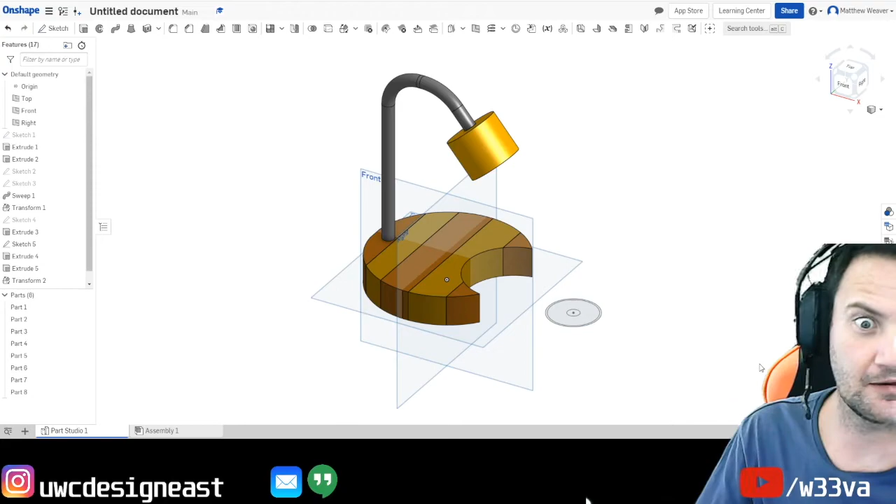Right then, so in today's lesson for Onshape, we are going to draw a lamp. And the lamp, start again. Okay, in today's, start again.

In today's lesson, we are going to draw a lamp using Onshape. The lamp will be made of strips of wood for the base. It will be a bent aluminium tube for the arm, and for the shade we will do a standard cylinder with a hole in it.

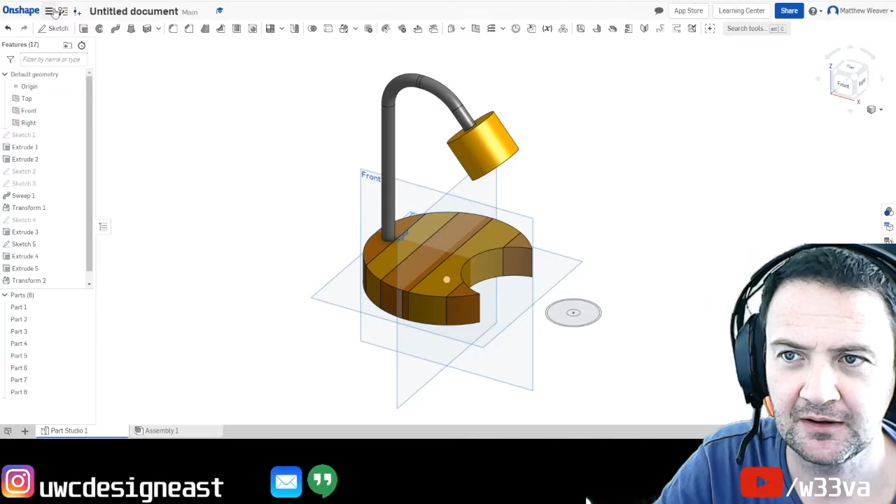We're going to cover the basics really, so nothing too difficult. It should end up looking something like this, but I'll draw it from scratch. Once you've signed up for Onshape using your educational account, and you've used the school's phone number instead of your own to protect your data, you don't need to install it because it's web-based.

What you'll do is you'll end up with something similar to this. It will be a blank page, hopefully, and all you need to do is go to create and document, and then we'll call it something. So let's call it lamp.

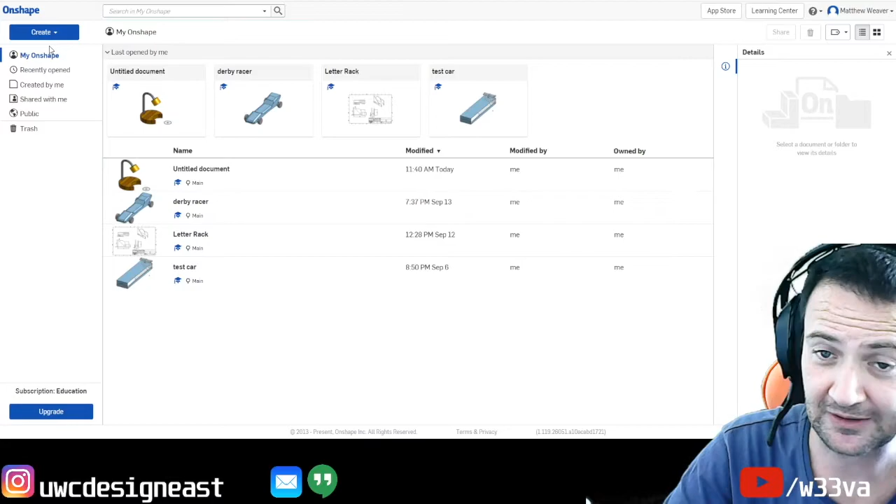Now because we're using the web and not an app that's pre-installed on our computer, things do take a little bit longer than in something like Fusion, because we've got to wait for the network. When you get to your new project, you'll be faced with three planes. That is the top plane, this one here, and that is you looking directly down at it. If I click top on the view cube, that's a 2D representation of that plane. We've also got the front, which is there, and the right as well.

So there's your view cube. To get from back to front, you click the outside. To go to your 3D views, you click the corners. To go directly to it, you click the word itself.

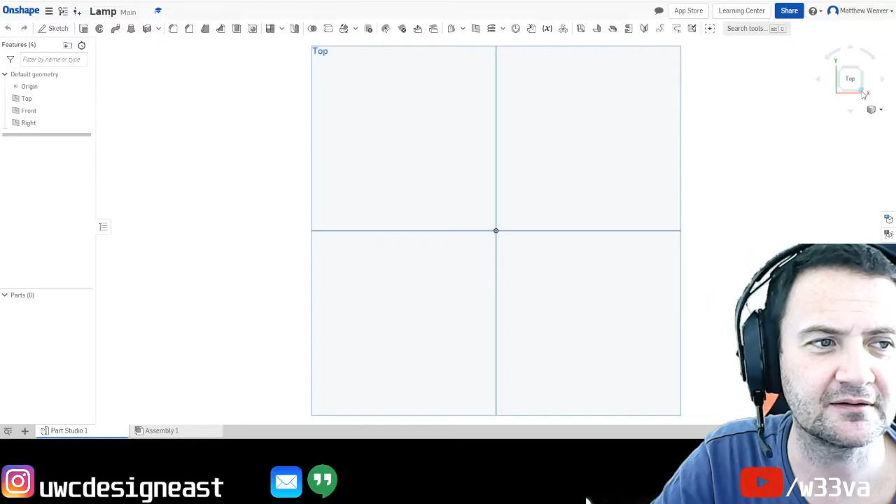The way it works is we draw a sketch, and then we extrude that sketch into a solid, and then we start a new sketch and extrude that sketch, and so on until we've got all the bodies, and then we put them together. It's very simple, and we're going to go nice and gently so we can get started with Onshape, because I know it's quite new for quite a few people.

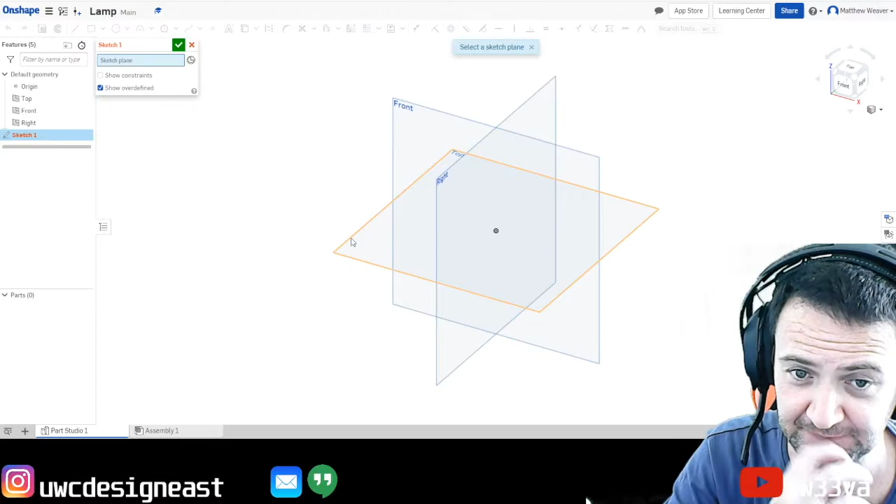First thing we're going to do is click sketch. The sketch plane we're going to draw on for the base is going to be the top, so we're going to look down, draw our shape and extrude it out. And then, apologies, let's cut that. Okay, so the first thing we're going to do,

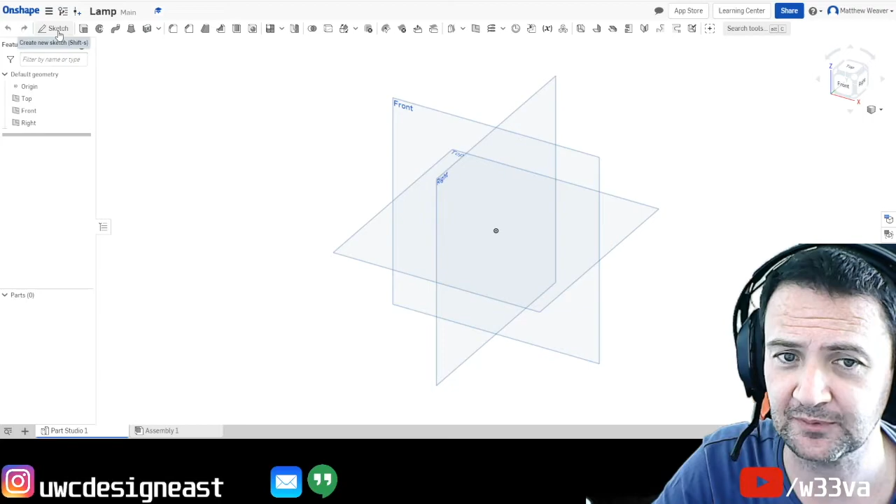the first thing we're going to do is set our work units, because at the moment they're in inches. So we click on the three lines next to Onshape, go to workspace units, and where it says inch, we're going straight into millimeters. When that's done, we go to sketch. In blue it says select the sketch plane, so we select top, and we're going to draw the profile from the top down and extrude that out.

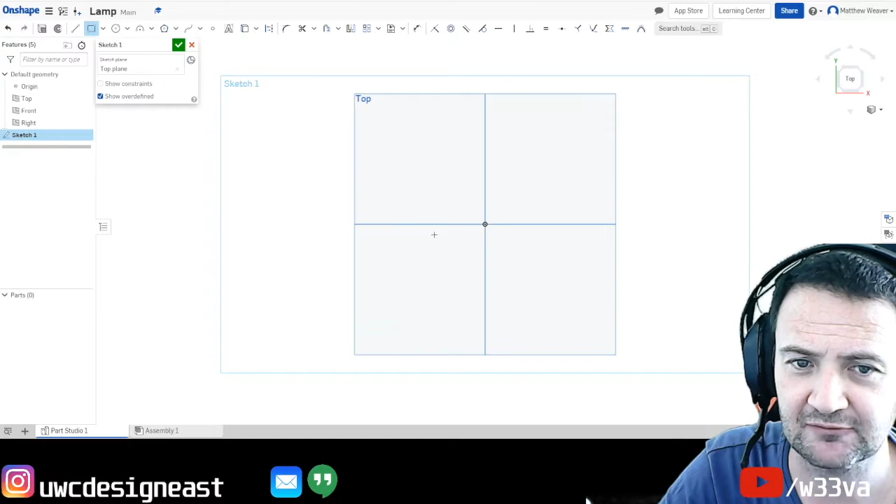Now I'm going to go to the view cube and click top, so I'm looking directly at it. Remember what our construction lines are, that's what we're going to start with. We're going to draw a rectangle that symbolizes the total amount of material you're allowed, or that you have. There's our rectangle, and I'm going to add the dimension, so I can press D, or look across to the right and click that dimension.

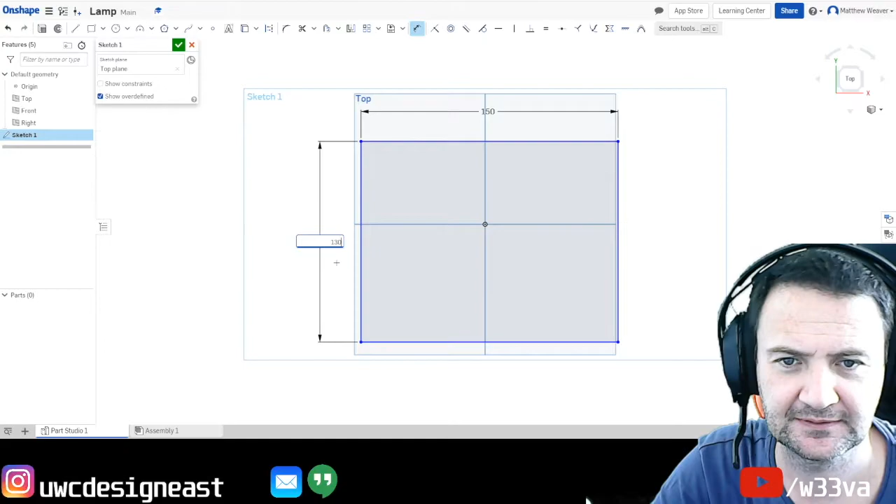I think it was 150, press enter, just wait a little, there you go, and D again, click that, and we'll do 130. Okay, so that's done. Now obviously we're not going to be using all this material, and we're not making a square, so I'm going to turn this into a construction line. There's the button there, Q for construction, or click that, press escape, press the construction line.

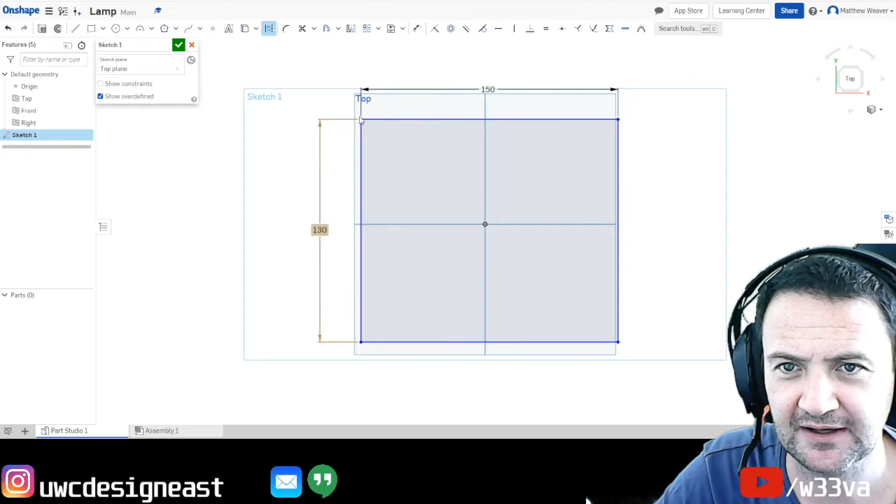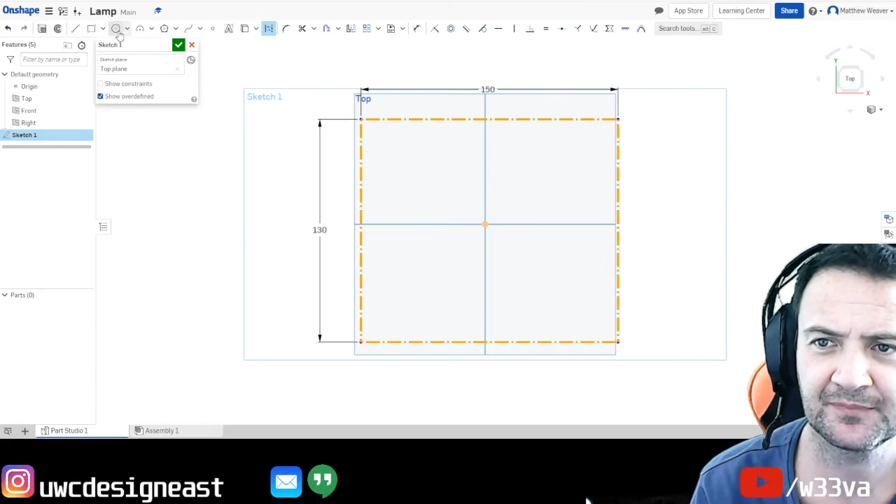Okay, and now we're going to click it. What I did is I selected all the lines and pressed the construction button or the letter Q, and it turns those into construction lines. So now I draw my shape within the construction line box, and my shape that I've been demonstrating quite a lot has been a circle.

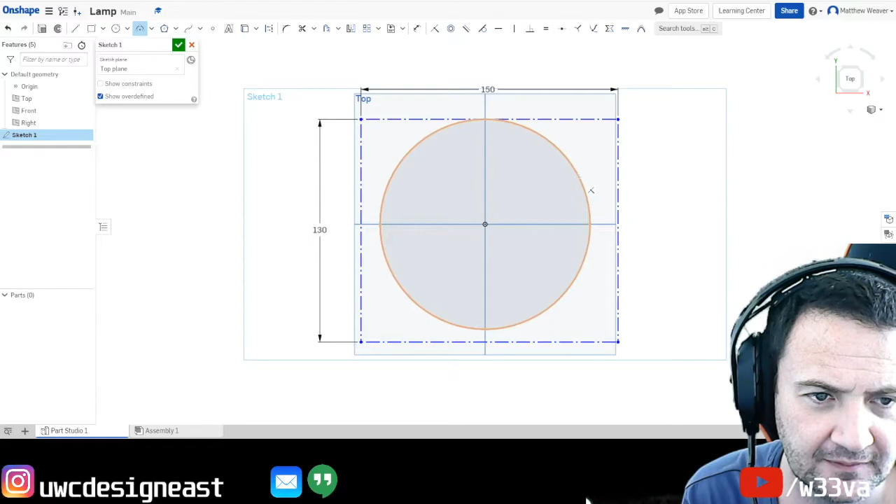Let's not go overlapping. So there's my circle. Now I'm going to unselect, select that, and go back into not a construction line. So there's the circle, and it's had a circle taken out of it. So here we can actually use the arc tool. I'm going to click the arc, click once, click twice, and then just bring that in a bit.

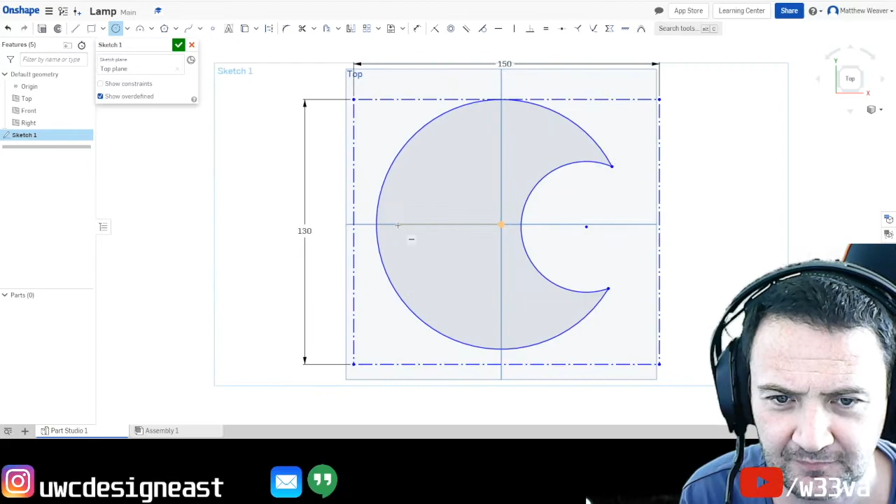Okay. Now the beautiful thing about Onshape as well, instead of like Illustrator and things, is that you can trim. So if we have a look at the trim button, which is the letter M, or the scissors, I can just trim that out. And there's the profile. Now it's pretty much done. All I need to do is make a hole for the pole. So I'm going to click the center point of a circle and just draw that hole there. And I know it's the wrong size, so go to dimension, click the circle, and just type in 10. And that's updated.

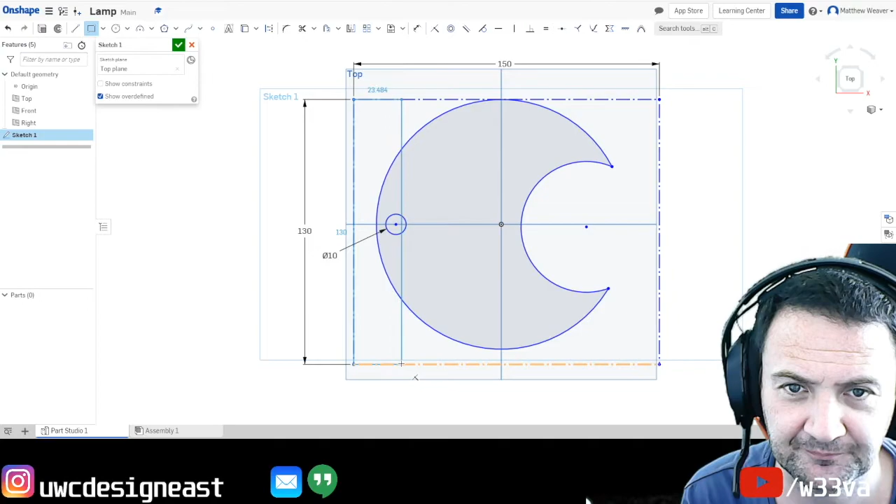Now we're making this out of planks of wood. Okay, so what I'm going to do is I'm going to draw rectangles that represent the planks of wood. These aren't going to be construction, these are going to be real. So it's about 23, and that one, and of course they are random, so you'll have to measure your own planks of wood. And these are the planks of wood, and as you can see, that now looks a bit more accurate. Okay, so it is going to look something like that.

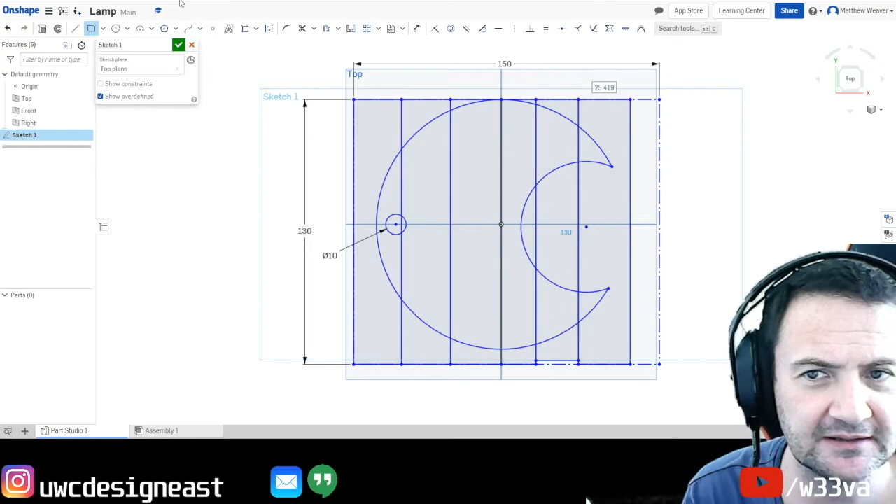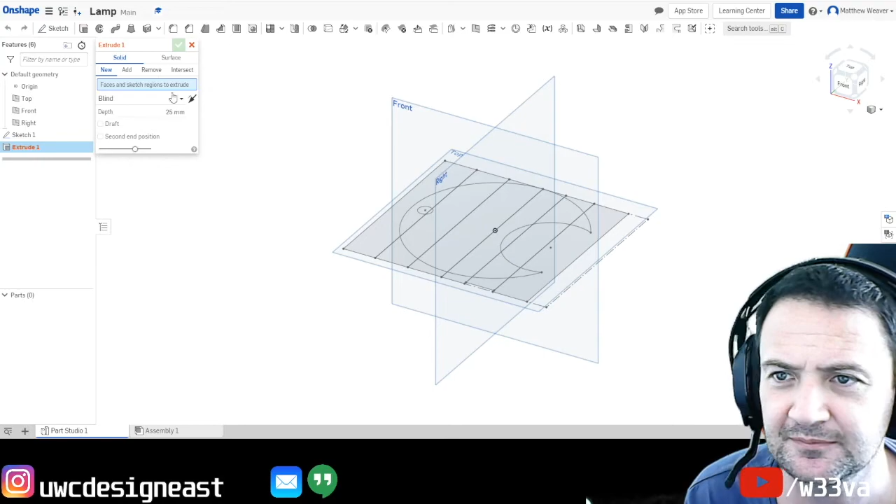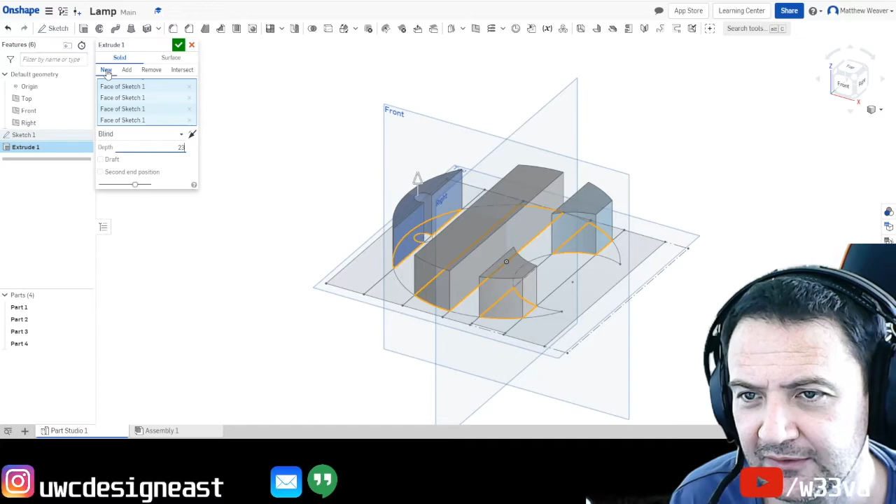Okay, so let's stop that sketch. So press tick when you're happy with the sketch, and then we're going to go to a 3D view. So I'm just going to click one of those corners. Okay, and now what we're going to do is we're going to extrude. So that is Shift E, or the first button next to sketch, and we're going to select the alternates. Okay, so let's zoom in a bit. 1, 2, 3. Okay, we're going to do that, and I think the height is 23 for some people. Of course, you'll need to measure the wood first. And we're creating new solid, so that's okay.

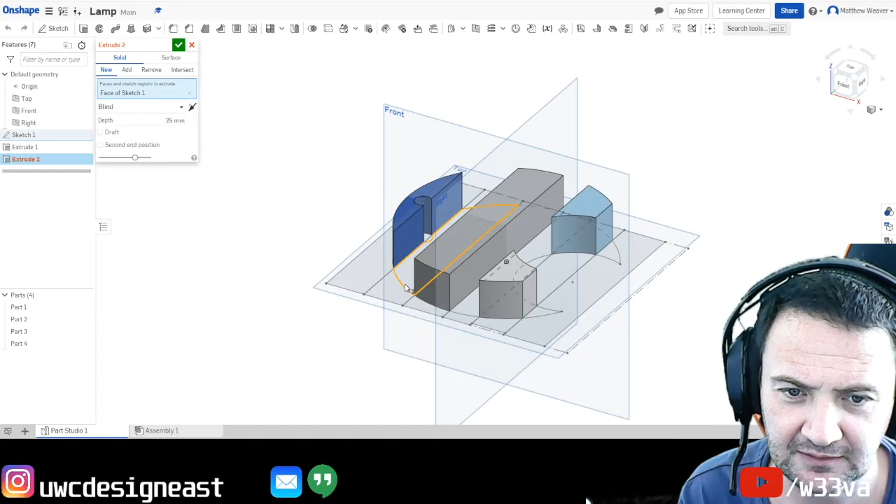All right, now nothing's actually been deleted, it's just disappeared. So if we have a look onto our left hand side, we can see the sketch has got a little eye with the line through. So let's show that sketch again, and this time we're going to do it for the others. So we're now going to click, click, click, and click. Okay, now if they're different sizes, you can put them as different sizes. I'm going to do them as different sizes because I think it looks pretty cool, but you don't need to. So I'll leave them as 25.

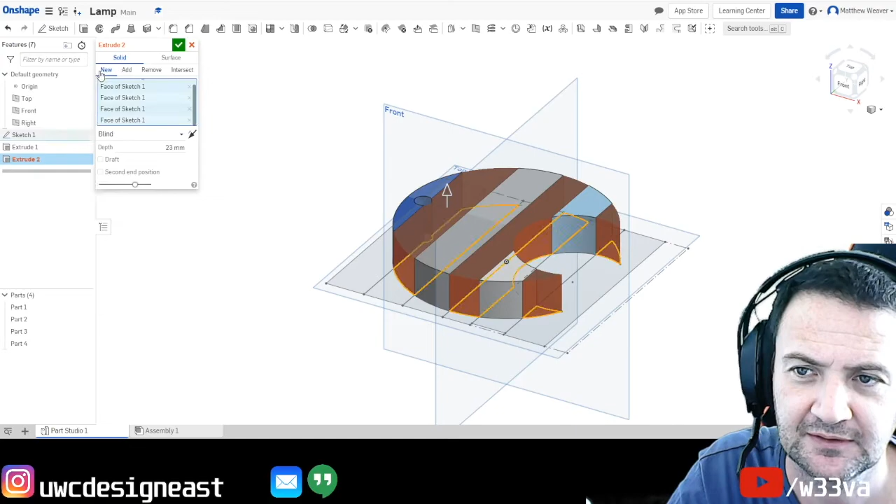If you said you didn't want them to be the same size, what we can do is we can go to 23. Now what you've got to be very, very careful of is, if they're all one size, you might get the add button. Now if you get the add button, that whole piece becomes one piece of wood. So it's got to be new, so that they're all separate, and that means we can assign them a different color. Okay, so let's do 25 and happy with that.

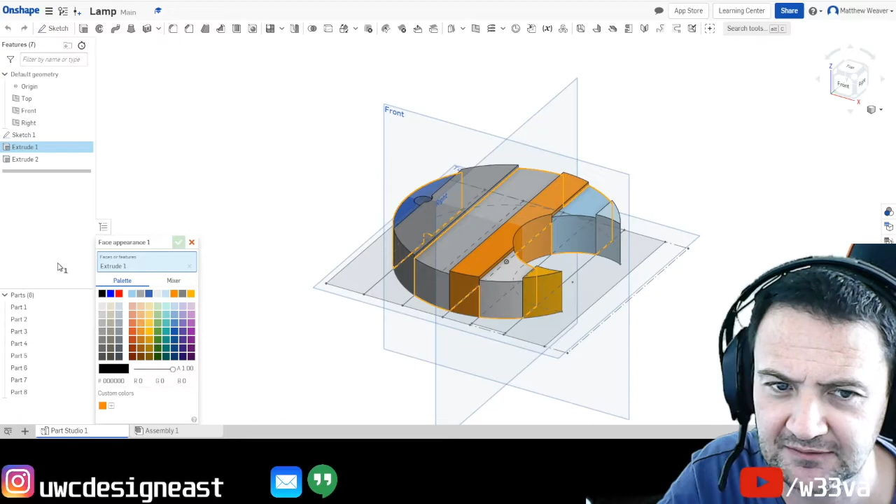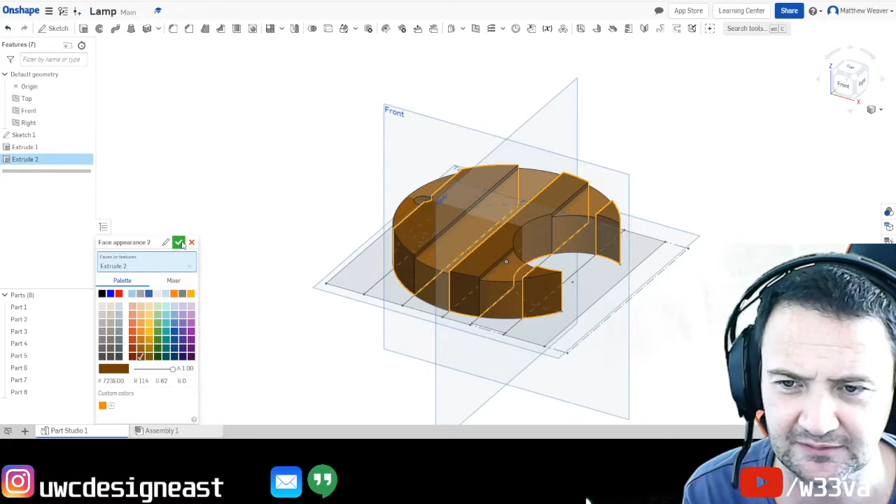Okay, so I've got extrusion 1, the first ones I did, extrusion 2, the second ones I did. Click that, right click, add appearance to the feature, and I'm just going to do that shade of brown. And then extrusion 2, right click, set appearance, and do a different shade of brown. So I've got 2 separate shades of brown. It doesn't look as realistic as Fusion, but it's a lot quicker, and if you're under the age of, I think, 14 or something with Fusion, you're just not allowed to use it anymore. Okay, done. So that's that.

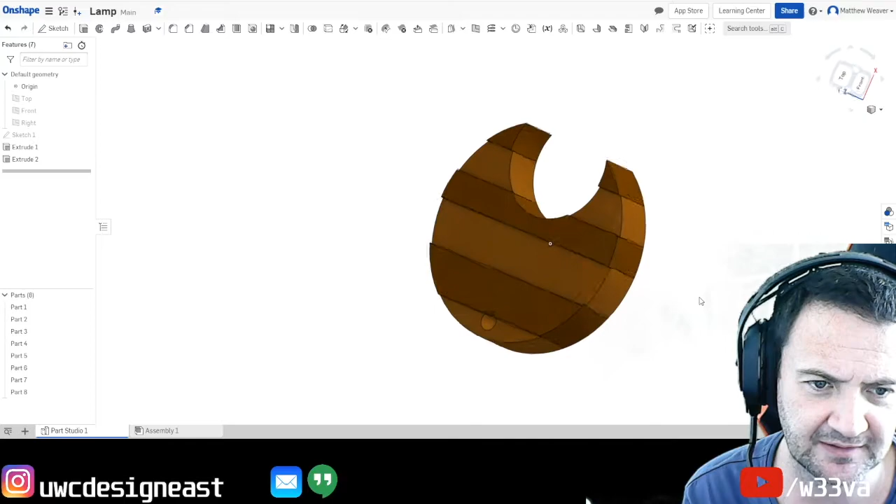It's a little bit confusing. Why don't we hide the sketch so we can't see that? And we can actually also hide some of these planes for the time being. And there we have it. Now you can actually right click and just spin that around. Have a look. There's the hole.

So let's start with the pole. Now the pole's a little bit different to just standard extrusion. What we're going to do with the pole is we're going to do something called a sweep. In order for us to do a sweep, we need to draw a line that would represent the pole itself, and then we have to draw something called a profile, which would represent the material the pole is made from.

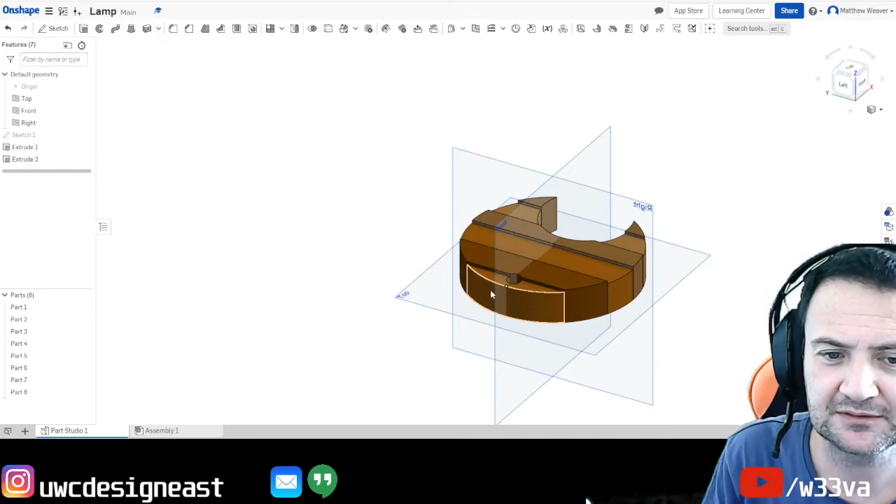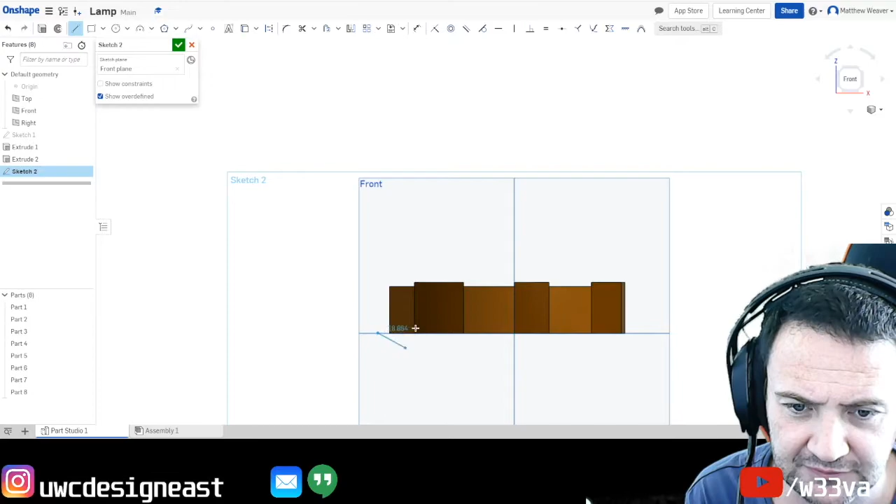So the first thing I'm going to do is I'm going to go to the front plane so we can see the side. I'm going to zoom out a little bit, and I'm going to start a sketch. Okay, now the sketch plane is going to be front, and I'm going to draw what I want the lamp to do. So if I just start on that line somewhere, and I want it to come up, and then I want it to go across, and then I want it to go a bit like that. Okay, and I'm happy with that. Press escape.

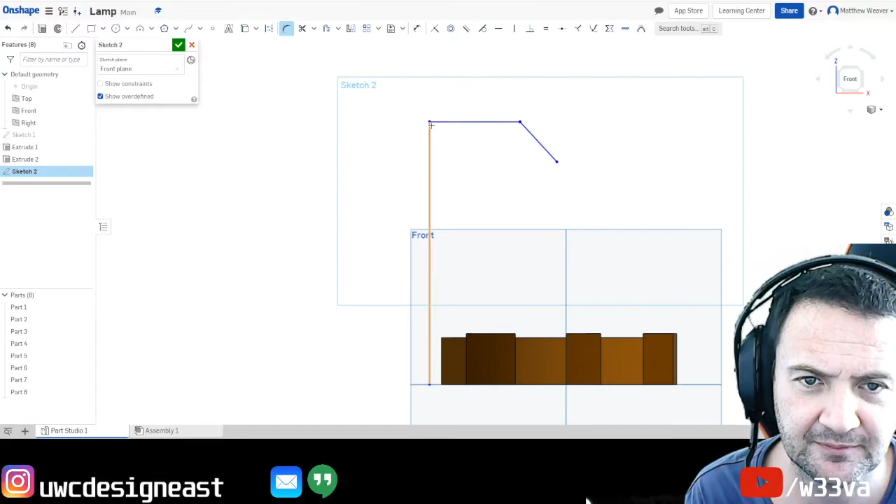I'm not gonna do the dimensions, but you should, because this is planning. The next thing we're gonna do is add the fillet. Now, we can't bend a 90-degree angle with the tube because it will snap in real life. So what we have to do is introduce the bend to it. So select the sketch fillet, the corner, or you can do the 2 lines, and then just move that to what you want. Okay, so that's pretty good and done.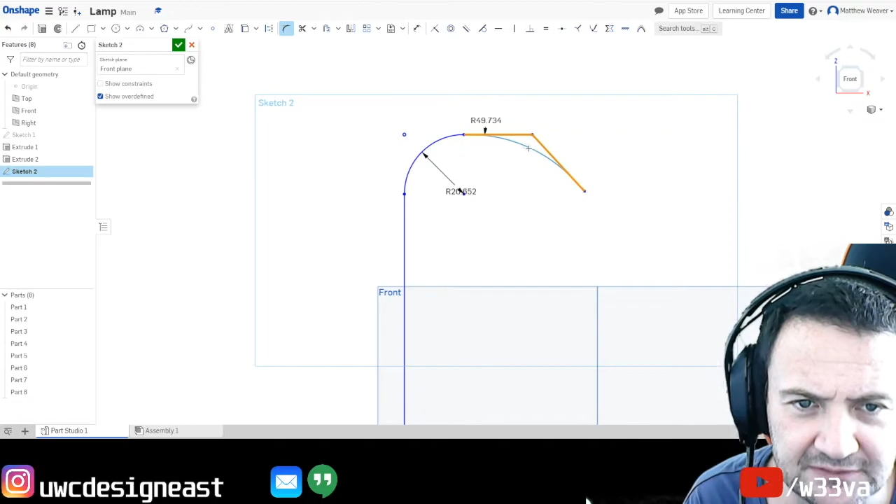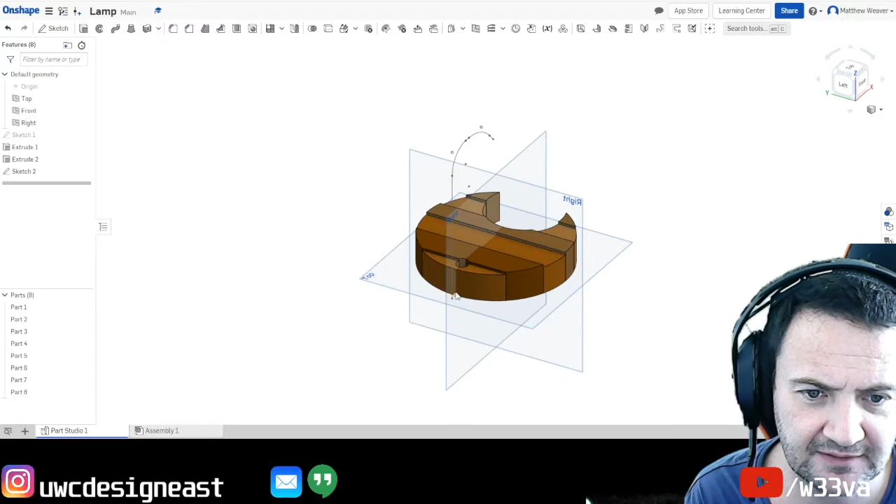And we're going to do that again here. Come round. If it goes red, obviously you've gone past the initial, so it can't be done. And when you're happy with that, that's done. Okay, so that is the shape or the path of the lamp. So now what we have to do is the profile. So we're going to finish that sketch. If we go back to 3D, you can see very lightly that is the path there.

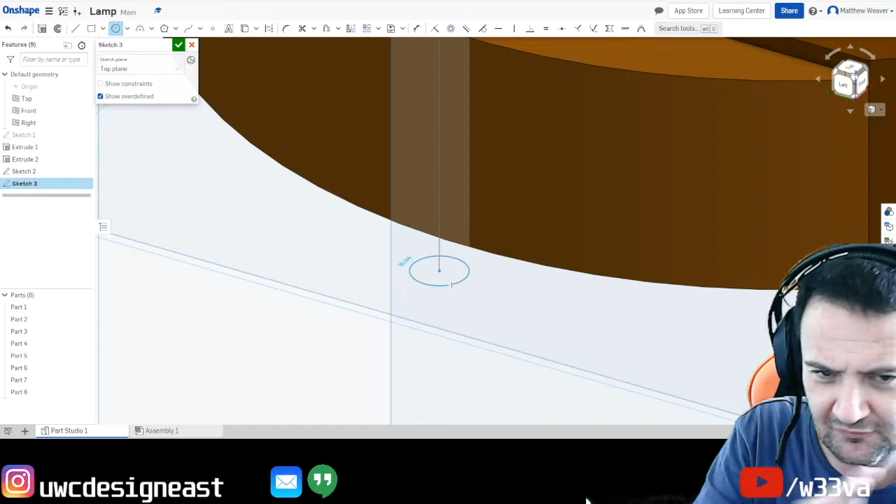Okay, so now we're going to go sketch. We're going to select top, but we're not going to move to the top. We're just going to select top. We're going to select that circle, zoom in, and we're just going to draw. That's surprising, normally I can do that. We're just going to draw a circle around the base of that path. Okay, we're going to add the dimension because the size of the pole diameter is 10,

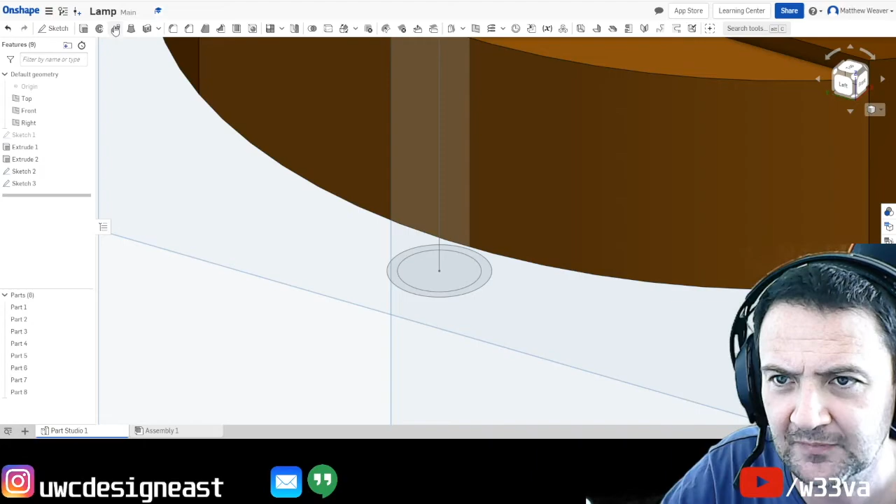and it's actually hollow. So let's do an offset. If I click this button here, click that, drag that arrow inwards, and it's actually about 1 millimeter thick. So there's the profile of the tube. If I cut a very small sliver and looked directly through the tube, I would see that circle there. So let's now go to the sweep tool, click that, and it's going to ask what is the face. Well, this is the face, and the path.

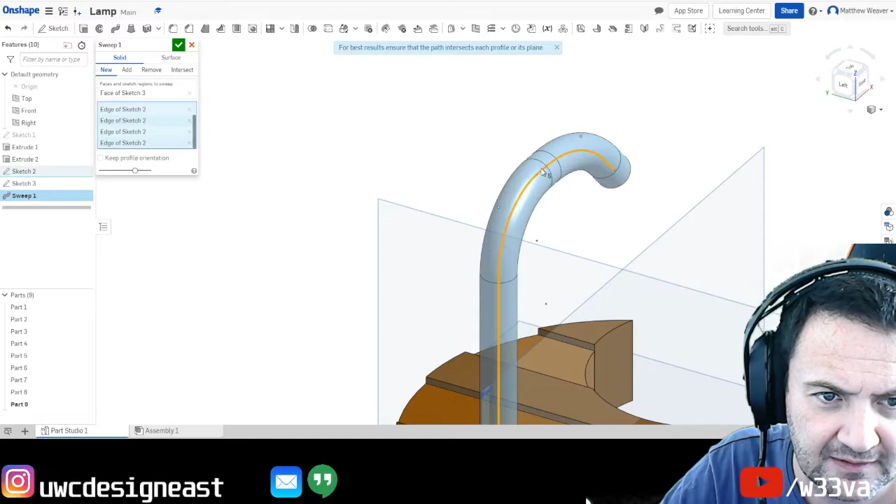So select the path, select that, and zoom out, and now it's coming up, and we want it to keep going, keep going. If you forget to select one in the middle, it won't work. So that's what it looks like, and if we just go there, you can see there's the tube. Okay, so that's done. Now we're going to move this into place.

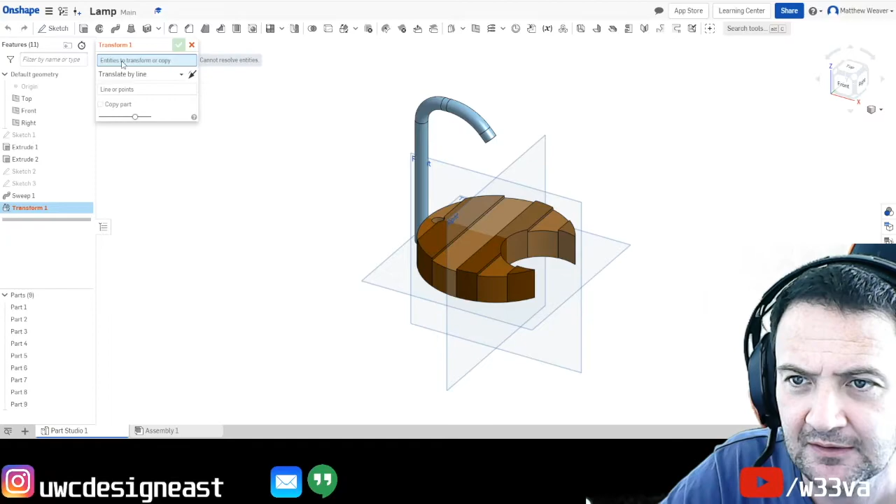To do that, we're going to use the transform tool. That's the transform button there. We can wrap stuff, but we're just going to transform it. The entity is the body, and we can do a few things. We can translate by XYZ, which means to actually move it around. That's not a problem. Another way we can do that is by transforming by the mate connector.

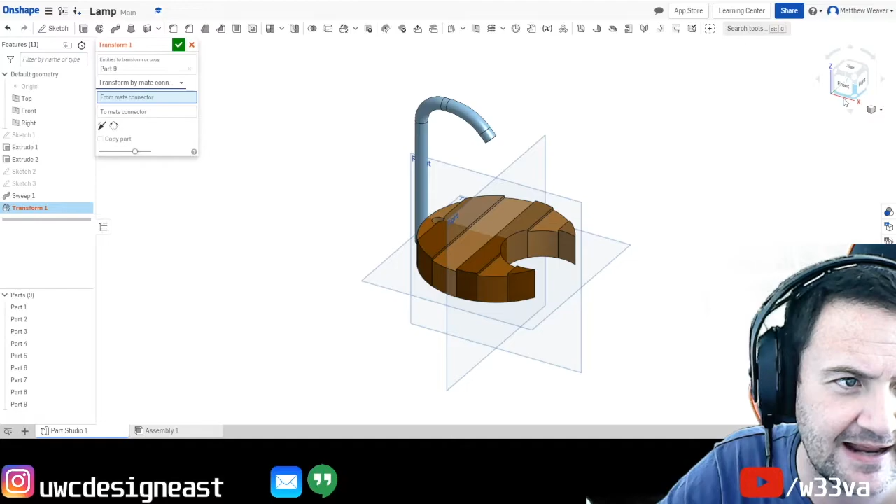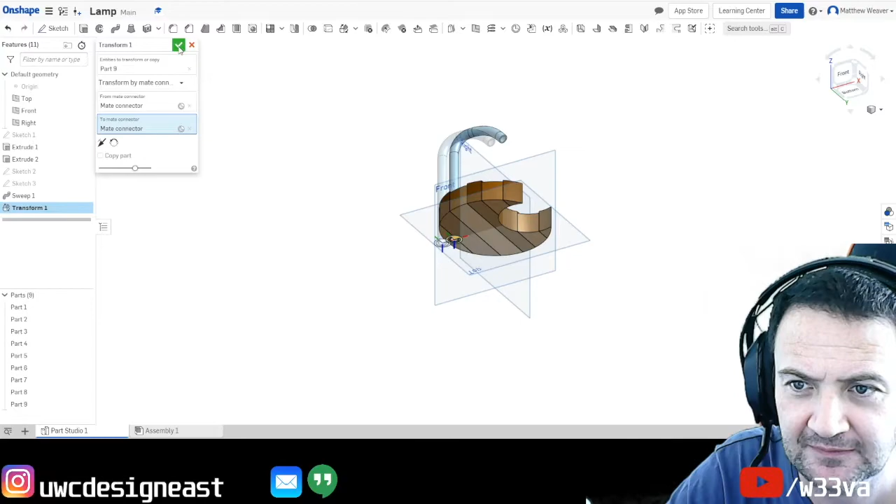So it says from there to there. Okay, and you can see that's just moved so that the circle is within the circle, and if you're happy with that, that is done. Now I'm actually going to move this pole slightly higher because of course we need the wire to come through there and then come out, and if it comes out like that, then we're going to have to add feet, and they're going to have to be quite big feet because the wire is quite thick.

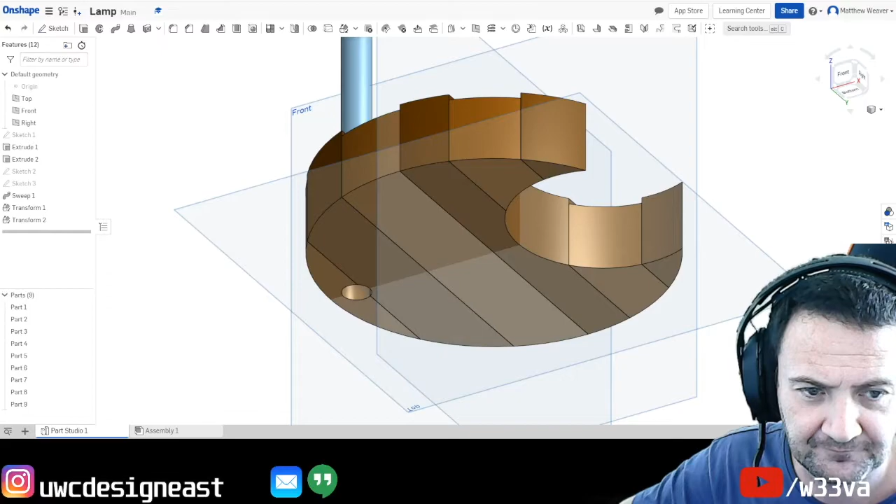So I'm going to transform again. The entity is that. We're going to transform it by the XYZ, and we're going to just move it up slightly and press go. So now, press escape, I should be able to just move that around. Okay. Now I do actually want a hole for this to come through, so I can draw a little rectangle there so the wire can come out the back. So why don't we do that now?

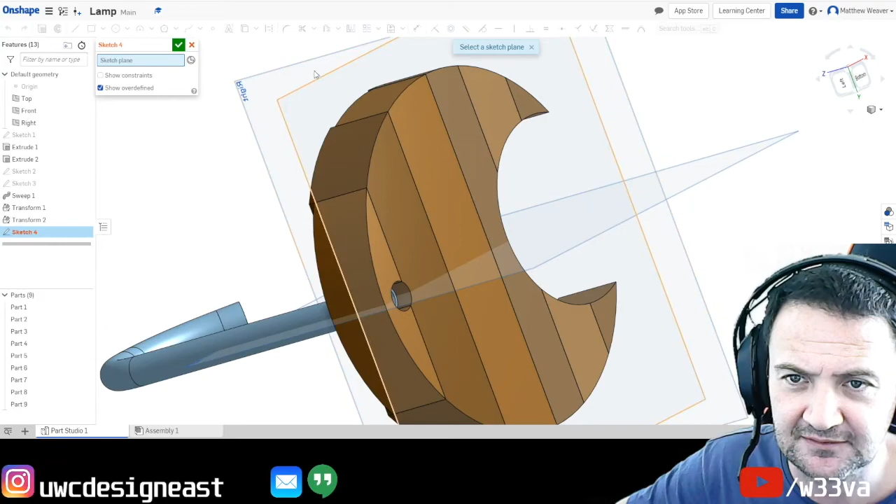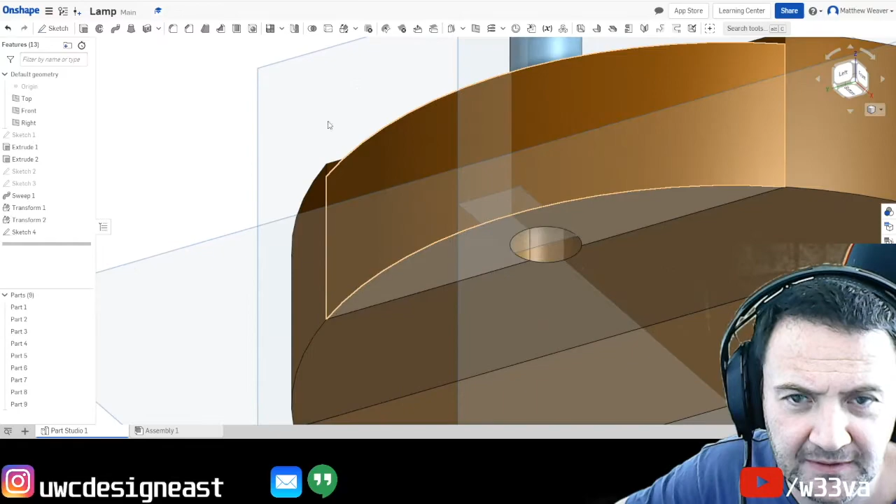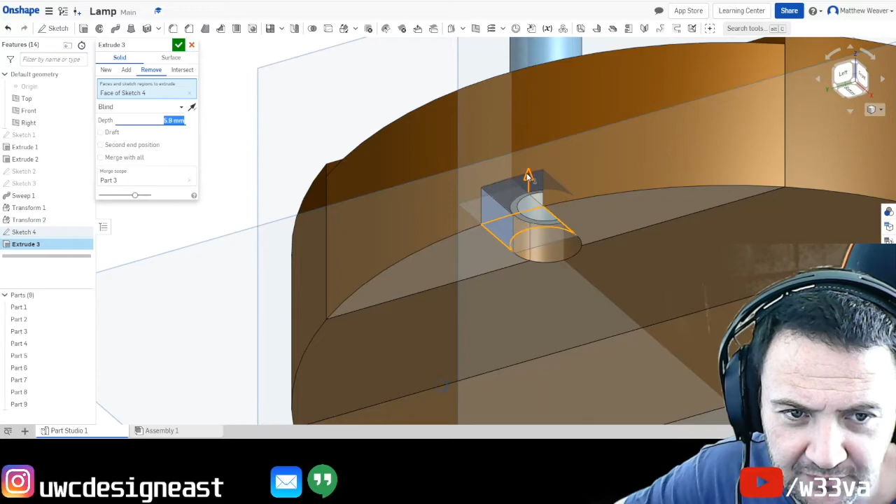So sketch, and instead of selecting the planes here, I'm actually going to select the edge of that piece of wood. And now I'm going to look directly at it. I'm going to do the rectangle, so the rectangle's going from there to there. I'm happy with that. Zoom in, extrude, and we're going to push that up, and as soon as I start pushing it, we want to remove it. So we're not creating a new block, we are removing part of that block, and I want it moved just to the edge of that tube.

Okay, so now the wire is going to come out and come through. So it will look like that around the back. However, around the front it will look like that, which I think is okay. So the next part is the lampshade. The lampshade I'm going to make is simply a cylinder with a hole, and we already know how to use the mate connectors to transform, so we'll do it that way. There are lots of different ways to do shades, but because this is the introduction video, we're just going to do the simplest way first.

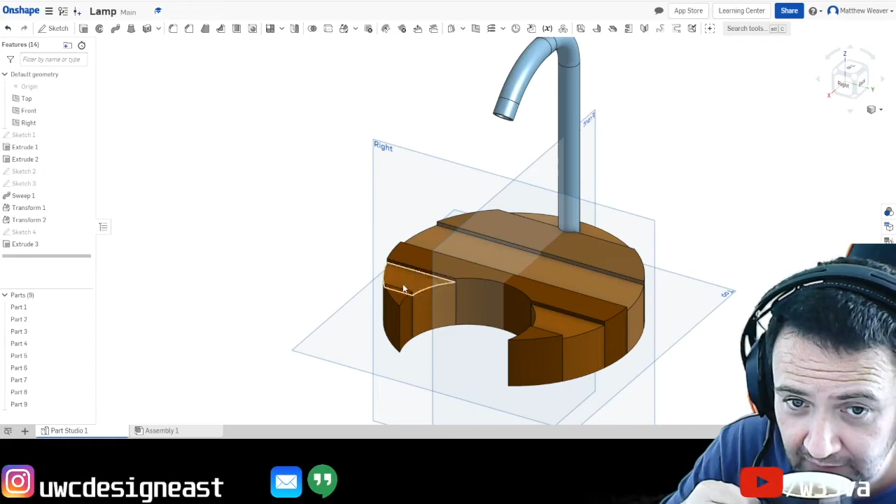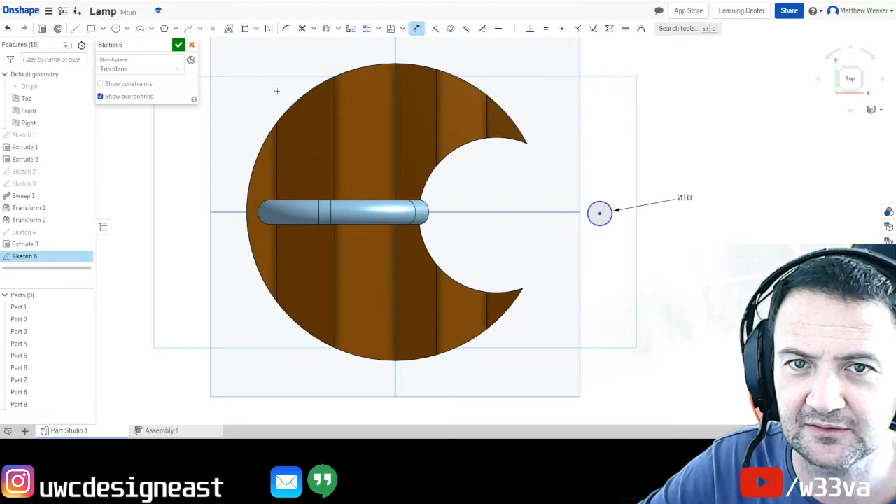So sketch, let's select the top again since that seems easiest at the moment. Look at the top, go for your circle, and the first circle I'm going to do is the hole for the pole. Click that, go to your dimension tool, click this, press 10. We can offset now, or just draw another circle, and say that's going to be 30 or something.

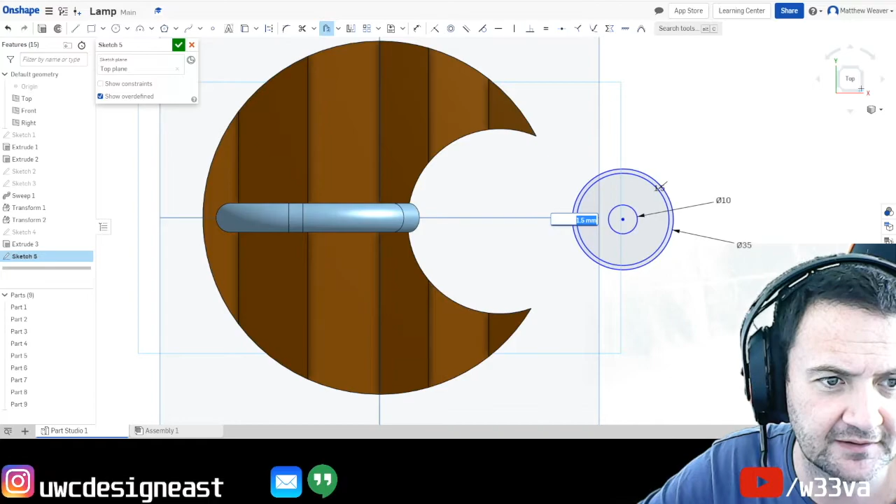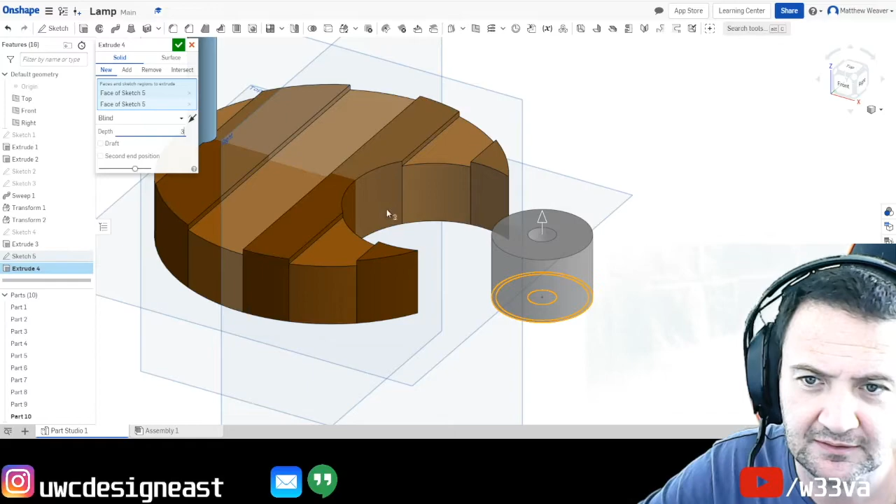I find it easier to do all my sketches and then do my extrusions. Some people like to do it bit by bit. So the first thing we're going to do is make the base of the shade. If we go extrude, and that will have that one and that one, let's give it 3 mil, so we've got something to glue it to, and press OK. So that's 3 mil. Now our sketch has disappeared, so I'm going to turn that back on and extrude.

That was a bit silly, I went and extruded it up. So select that, let's come back down, and I think 25 is pretty good, so let's leave it at 25, and we're going to go forward. Now that has joined it, so that, did that join it?

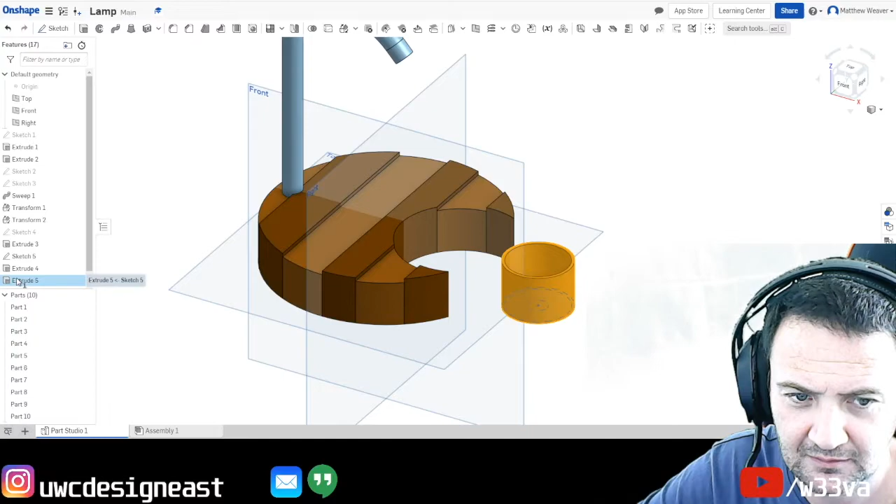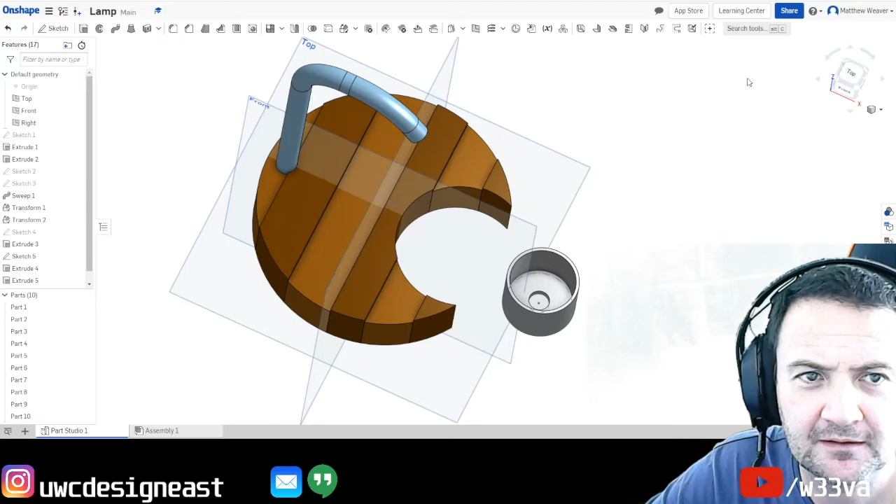No, it didn't. Okay, so I've actually now got two separate extrusions. You could have got around that by adding the add button to it instead of new. But let's say this has happened, what can we do? We can actually combine them. This is called a Boolean in normal places. So why don't we try and do that?

Combine, where is the damn tool for combine? God damn it.

I want to join, and you can't. Why can't I join? It's bullshit.

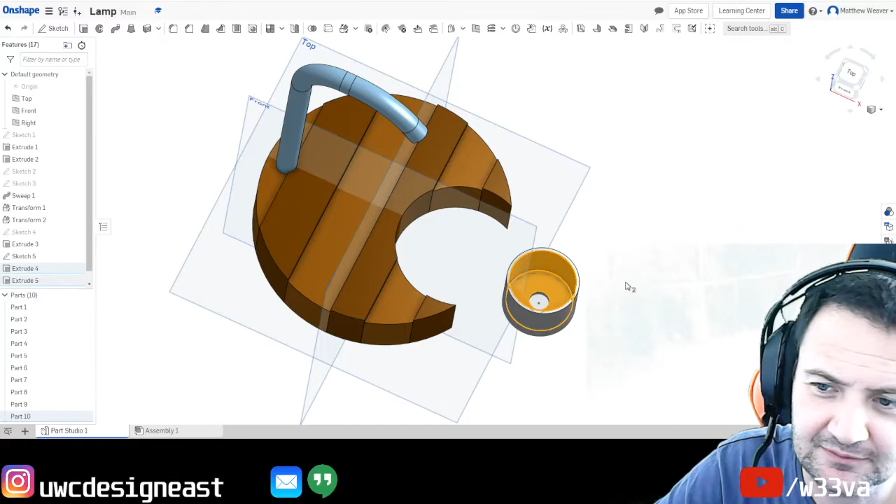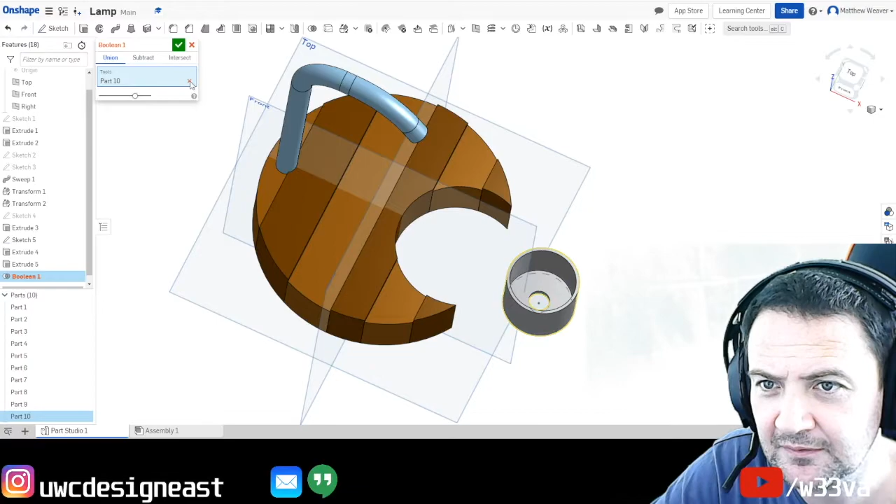Okay, so I've actually got two separate pieces, and I want to join them. If I click this one here, which is the two circles overlapping, Boolean, and it's a union, I'm going to join them together in union. Not going to subtract one from the other or do the intersection where you keep the part that's intersected. So this one is that one we're going to join, and hang on, stop that again. Boolean, the tool, and we are connecting it to that and that. Yeah, okay, done.

That, I don't like that at all. We're not going to do Boolean. It's rubbish.

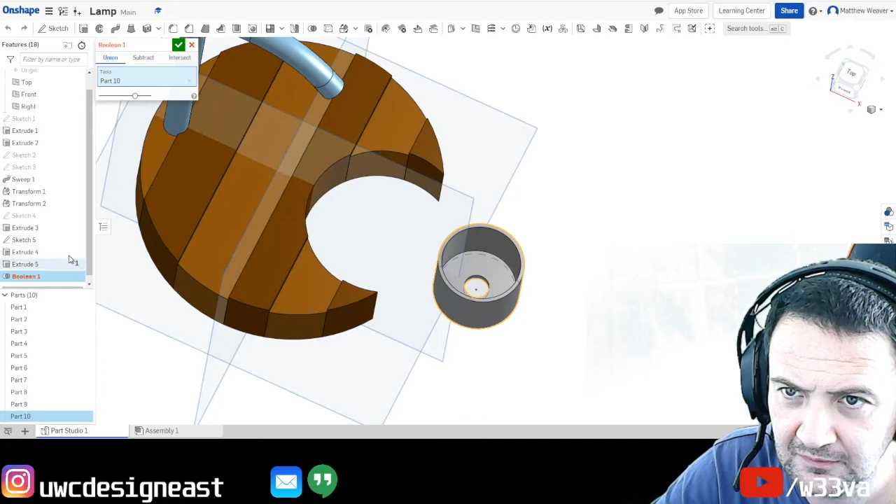Okay, so here's the Boolean tool. We're going to click that one.

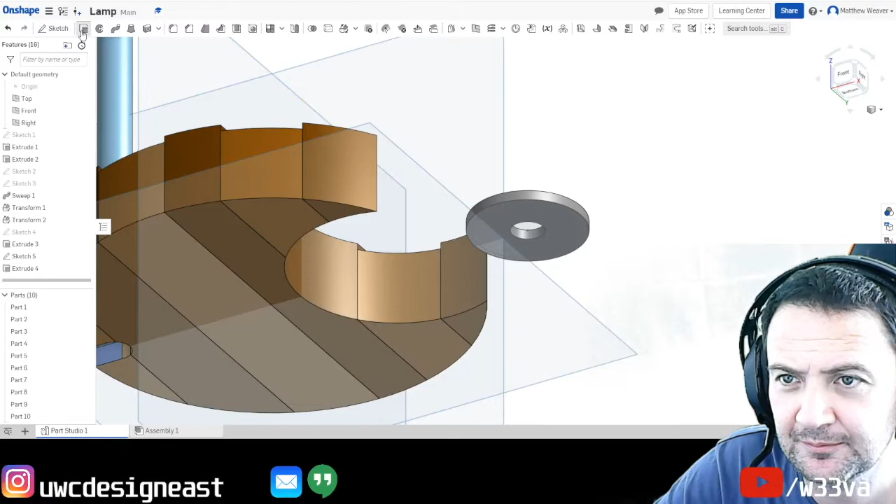Okay, so with the base just done, we're now going to turn sketch back on. Let's have a look at it. I probably did it the wrong way around. We're going to select the walls now, come up and add that to the base. Okay, so that is one whole piece. And now we're going to move that.

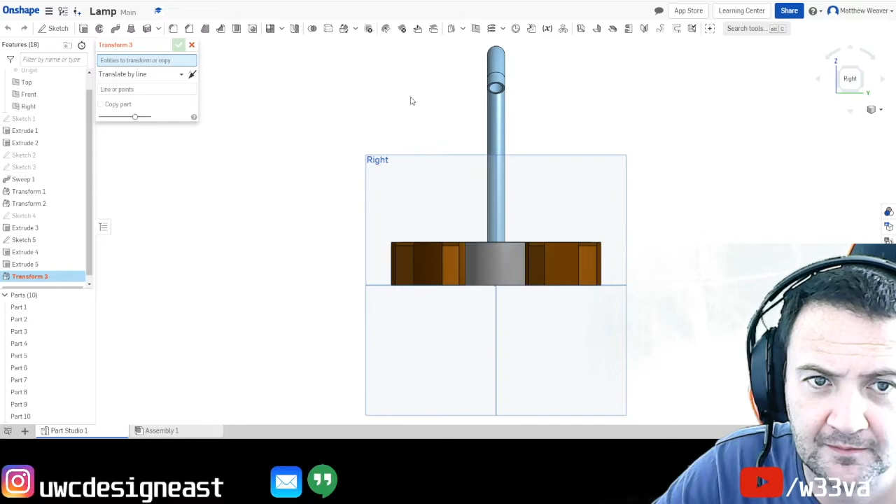The way to move it was to transform. We want to be able to see this circle here and this circle here. So we're going to transform by the mate, from this mate connector there to that mate connector there.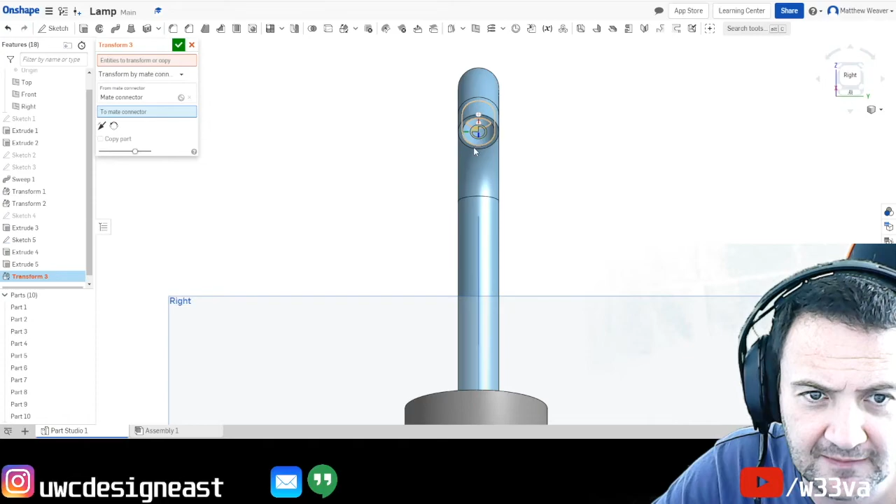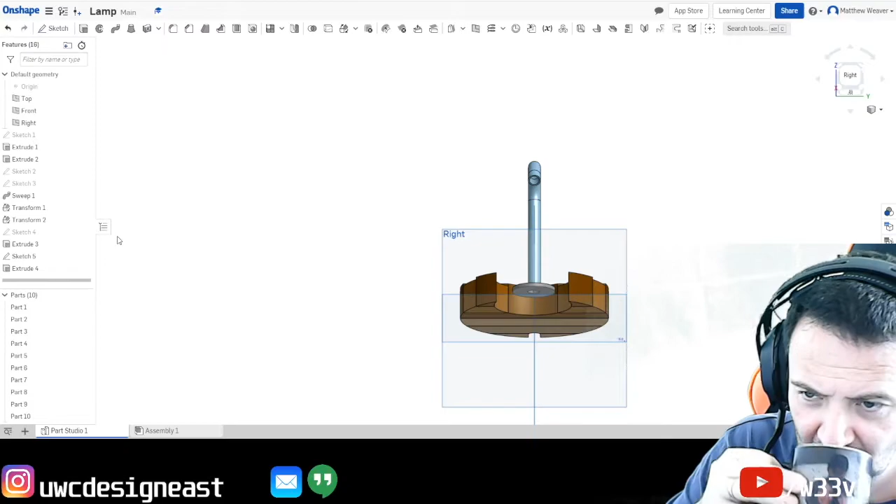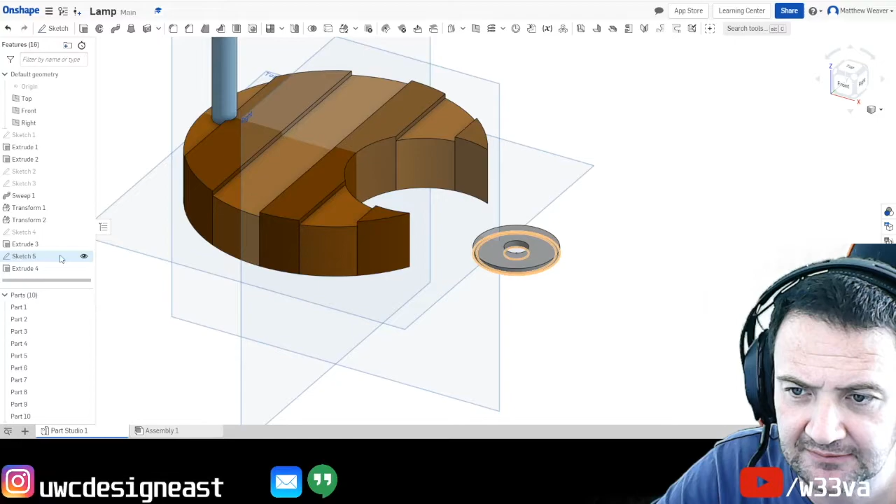Okay, so what I'm going to do now is extrude the walls of the shade. Let's turn that sketch back on and look underneath. Go to extrude, take that one down, and we're going to go the other side. I'm going to call that 25 on the other side. Now instead of dragging it down, you could have just done that. Press go. So now we've got that entity there.

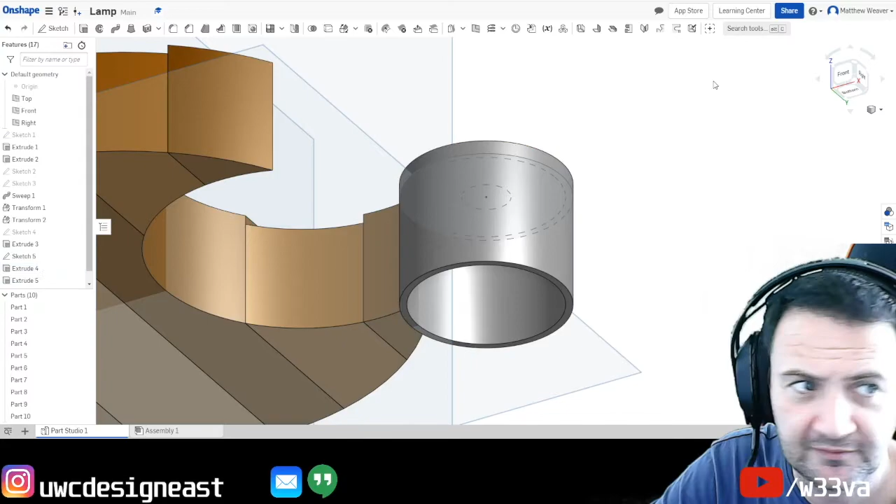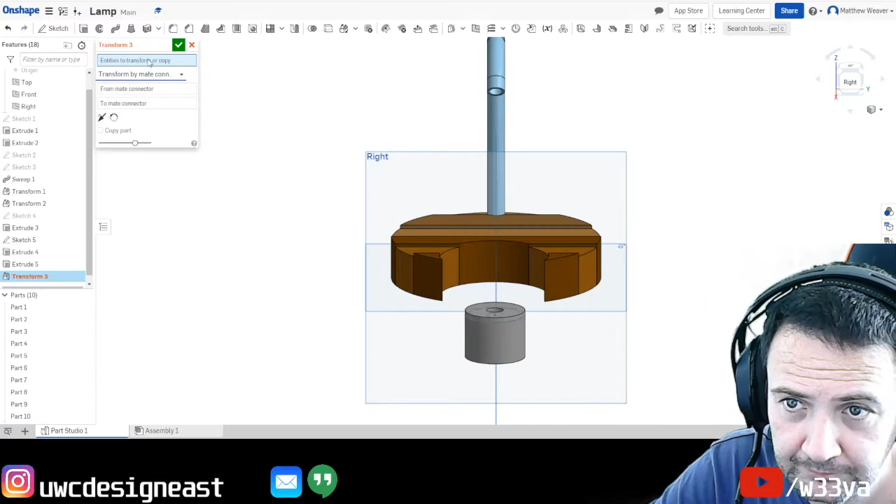Okay, and we are going to marry this with that. So we go to the transform, entities is that one, from the mate connector there to the mate connector there. And that is the wrong way round, so just click that little arrow there and press done when you're happy with that, and that is your lamp.

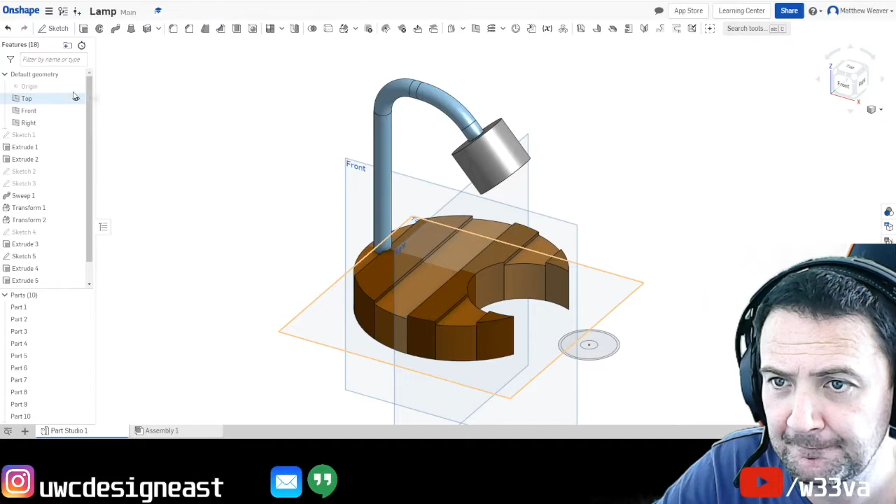That is the basic lamp that you need to do. We'll just hide that last sketch so it's not confusing to you, and that is it.